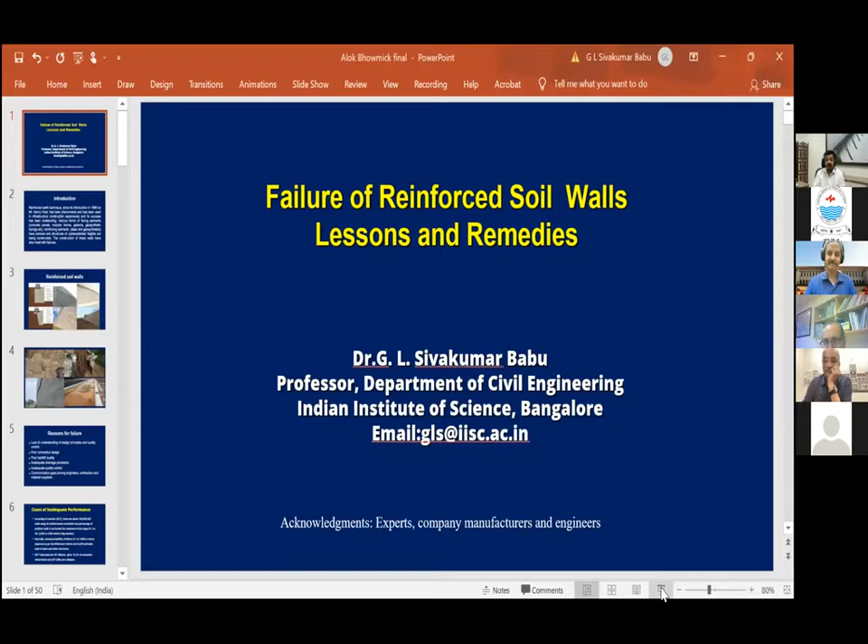Surely. So our today's session is on a very interesting subject: failure of reinforced soil walls, lessons and remedies.

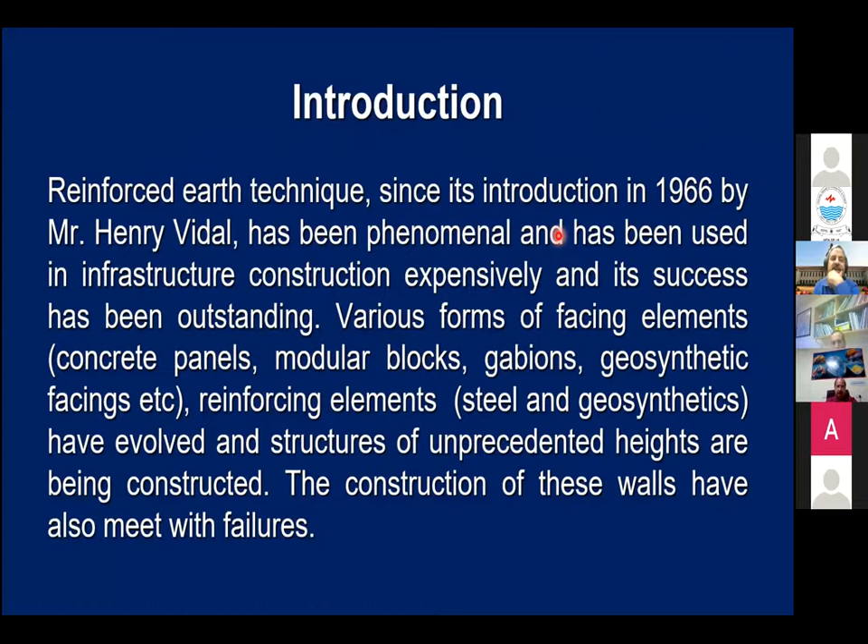We all know that the reinforced soil technique was introduced by Henry Vidal in 1966, and its impact has been phenomenal in infrastructure. It has been outstanding, and we have seen a lot of construction techniques develop because of that. We are going for regular reinforced concrete retaining walls, but now we have reinforced soil walls.

The reinforcement is coming from geosynthetics and the facing element, and we have different types of facing elements: concrete facing elements, modular blocks, gabion walls, and varieties of systems. In certain cases, to increase the stiffness of the whole structure, we even have a secondary reinforcement, quite common nowadays, with tight reinforcing elements in the form of nails. There's some sort of system here.

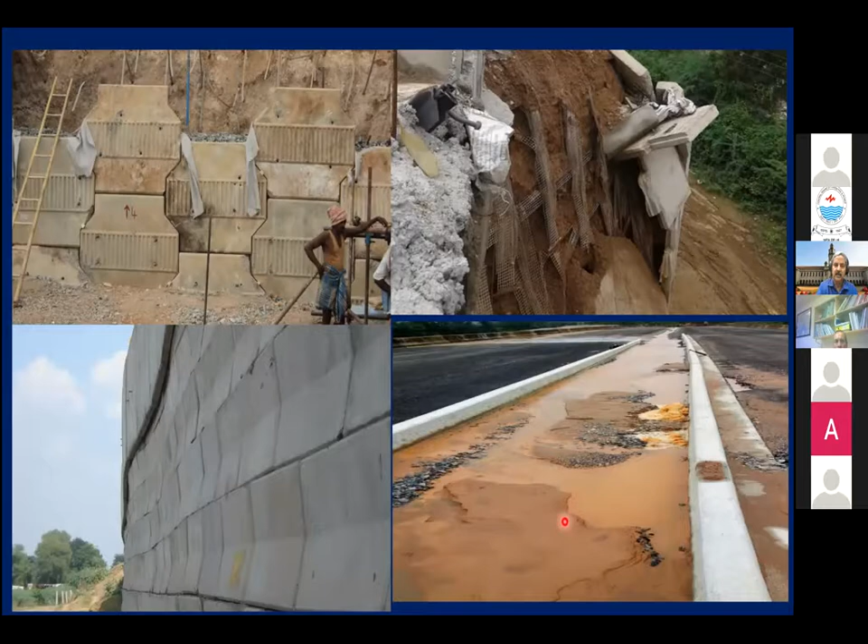General understanding was that there are a lot of failures happening. Now there are different parties working here - you have an owner, a designer, and many others like consultants and manufacturers. So all of these people are there, and there's a lot of changes taking place. And what is happening is some of the reasons that I just listed here.

One is a lack of understanding of the design principles and quality control - why there are some problems here. Then poor connection design - there is a reinforcement and it should be connected facing, and there is a connection issue. You have seen that some facing panels have come out. Then the backfill quality that is so important has not been satisfactorily done. Then the drainage that we need to provide for the system is not satisfactory. Of course, the total quality control in the whole system is another issue, and a lot of communication gaps among engineers, contractors, and material suppliers.

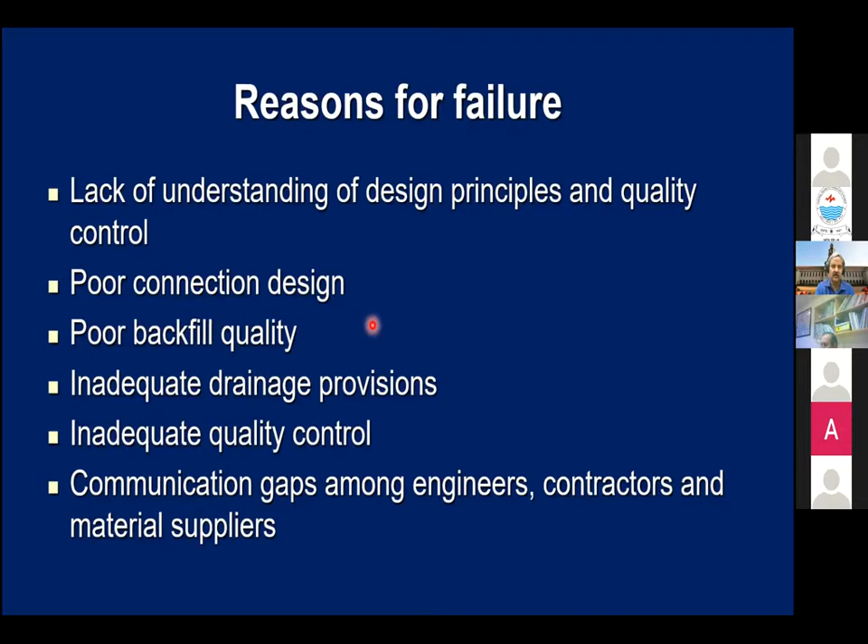This is what we see. So the issue is that when the technique has been so popular in the country, and at the same time there are a couple of failures - why is that? That's what we'll examine here.

Let me just come up with the studies by Koerner, who is actually the father of geosynthetics in the whole world. He has been a champion in this area, and he did a lot of survey on geosynthetic reinforcement structures, particularly retaining walls. He says that when you looked at more than 100,000 MSE walls, he estimates that there is about 2 to 3% or 4% failures, which is a big number. 1% or 2% is something big number, even in other places. I'm sure that maybe we are in the same range or maybe bigger, because we see that.

But I want to tell you that in civil engineering practice, we have this understanding of how many structures are subjected to failure. Say, for example, Professor Vivek will be knowing, particularly in dams, per annual probability of failure, they call it 1 into 10 power of minus 4. In fact, if you want to design a dam, you have to design for 10 power of minus 3 to minus 4 per annum probability of failure. We don't want to see dam failure, right? So this is actually well recorded, and most people are using it.

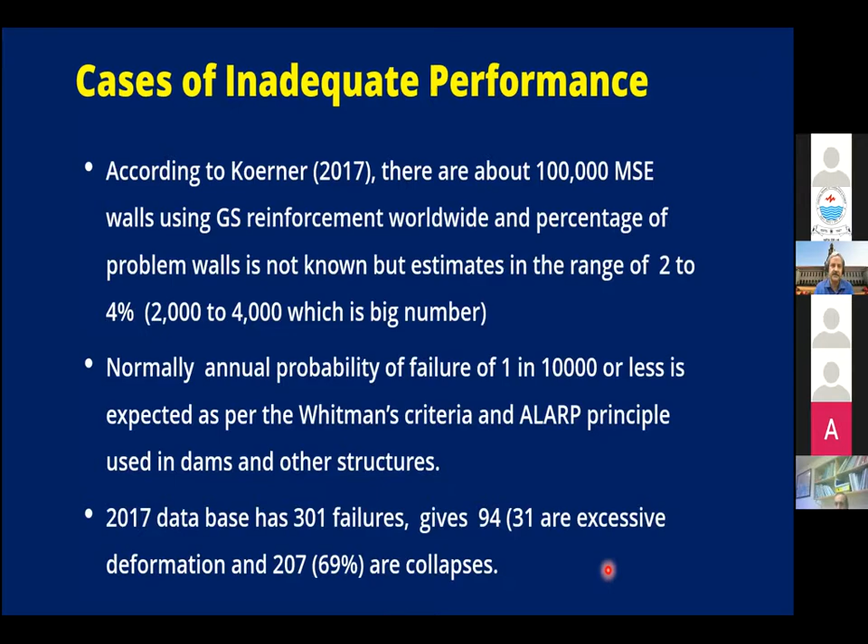When you are trying to look at failure mechanisms of all of the 301 or whatever number, he is even trying to categorize why is that. When you have, there are two things when you are trying to look at stability - one is external stability and internal stability, right? So in the 300 numbers, the internal stability, like when there is a reinforcement issue, that constitutes about 22%.

Soil - why? Because the friction between the soil and reinforcement may not be adequate. Actually, low soil friction - the soil friction itself is low, and then the interface soil friction is also low. Wide spacing of the materials - there should be something reasonable. You may have a design, but at the same time, certain constructional considerations, we need to have proper spacing here.

Then the length of the reinforcement and also the wrong orientation - I will give an example of some of them here, particularly the wrong orientation, with case studies over the years. That is internal stability, and the external stability, like what we use for regular retaining walls - sliding, bearing capacity, overturning, and all of them.

So there are failures because of high surcharge, low soil strength, bearing capacity being low, steep exit angle, okay, then seismic forces, internal water. What is that? The thing is that the backfill, the wall fill gets - whatever the reinforced soil wall is - it's because of the rainwater, there could be a problem.

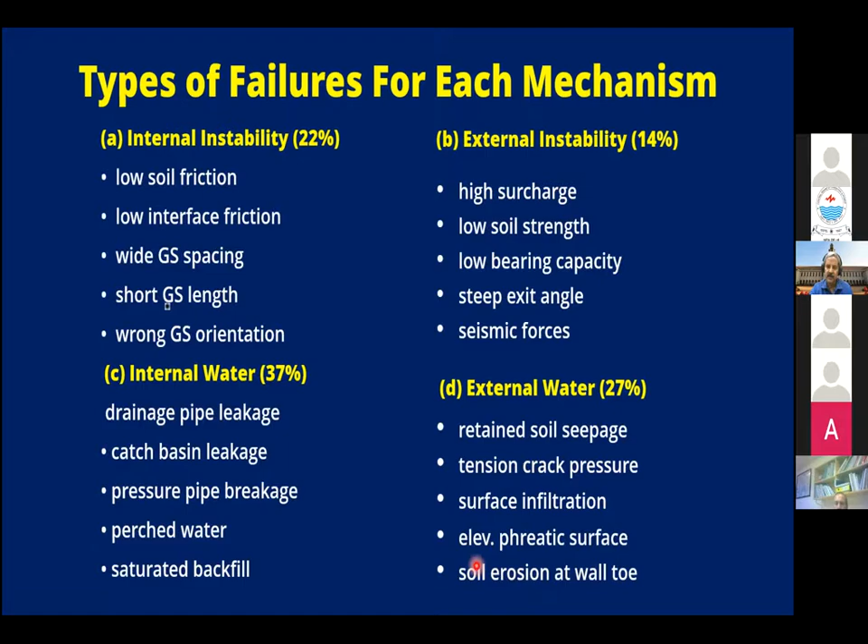So the drainage is not sufficient. There is a catch basin leakage. There is a pressure pipe breakage, perched water, some saturated backfill, or even external water - retained soil seepage. I showed one of some figures. Tension cracks, like you suppose you have some cracks at the bottom, top - there could be additional pressures, surface infiltration, phreatic line, soil erosion. This is all something that we have seen.

There is a need to understand and come out with some plan to reduce this number of failures in India. And of course, anywhere in the world, it's quite appropriate. I was just trying to see what are the typical reasons for the failure of reinforced soil structures. What I did was put a questionnaire to some group of people who were constructing. In fact, they're all members of the IGS.

Say, for example, Maccaferri, then Strata, and all of these people. I was in touch with them. I asked them, what are the typical reasons for the failure of the reinforced walls that your organization handles? Because they have been advocating, it is their bread and butter, but still they had some failures.

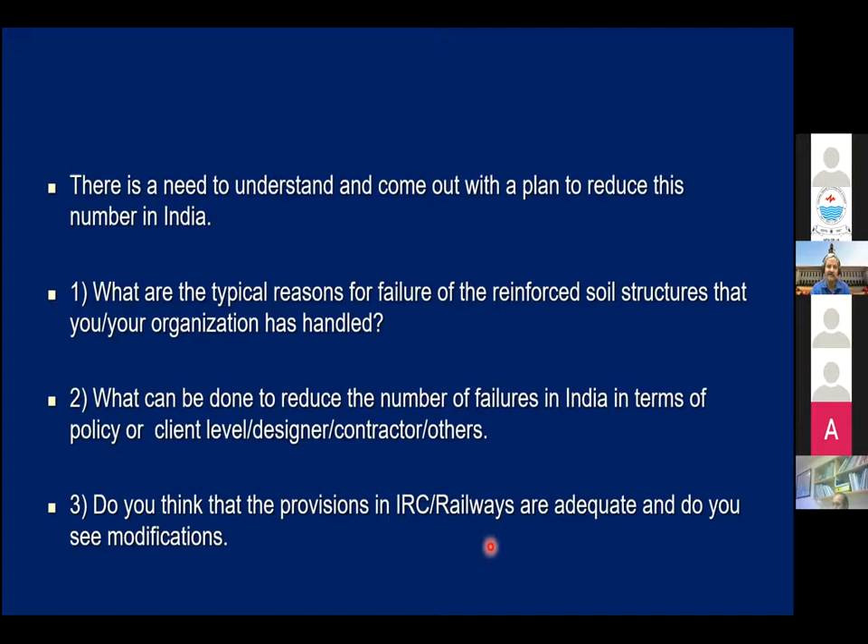I was asking them what are the typical reasons, what can be done to reduce the number of failures, because this is what is important for us. And what do you think about the IRC provisions, railways, the user? Do you see any modification? These are some questions that we had, and I had some discussions. So I made it like a critical review, and I showed some failures.

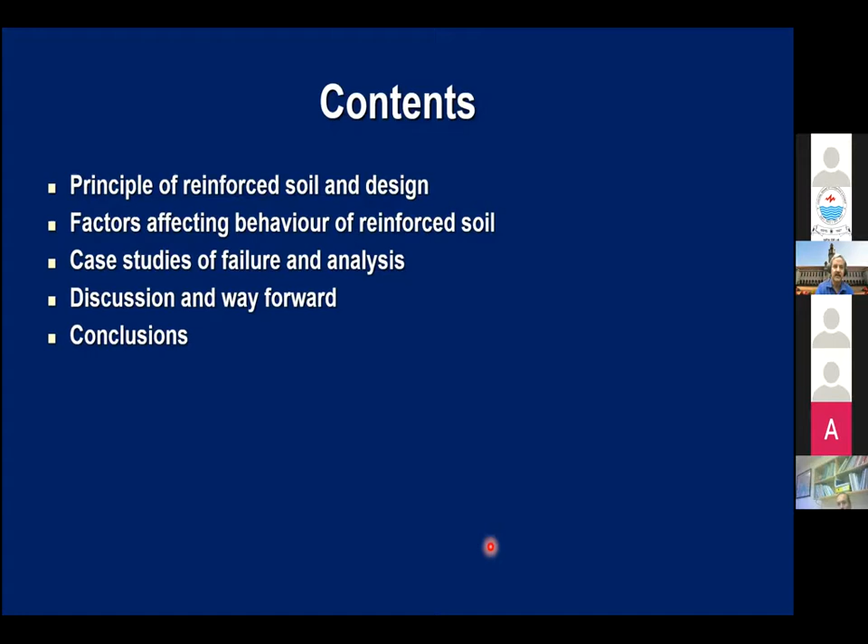Then the contents: what I want to tell you is, let us understand the principle of reinforced soil and its design, what are the factors affecting the behavior of reinforced soil, case studies of failure and analysis, and discussion of the way forward with some conclusions.

When it comes to retaining walls, we're used to, in the classes, cantilever, gravity, and braced. They're called externally stabilized, in which you have a retaining wall, and it is a gravity wall. The weight of the retaining wall takes care of the force acting on the system. Whereas here, the bending moment and shear force, and this is again external stability and all of that.

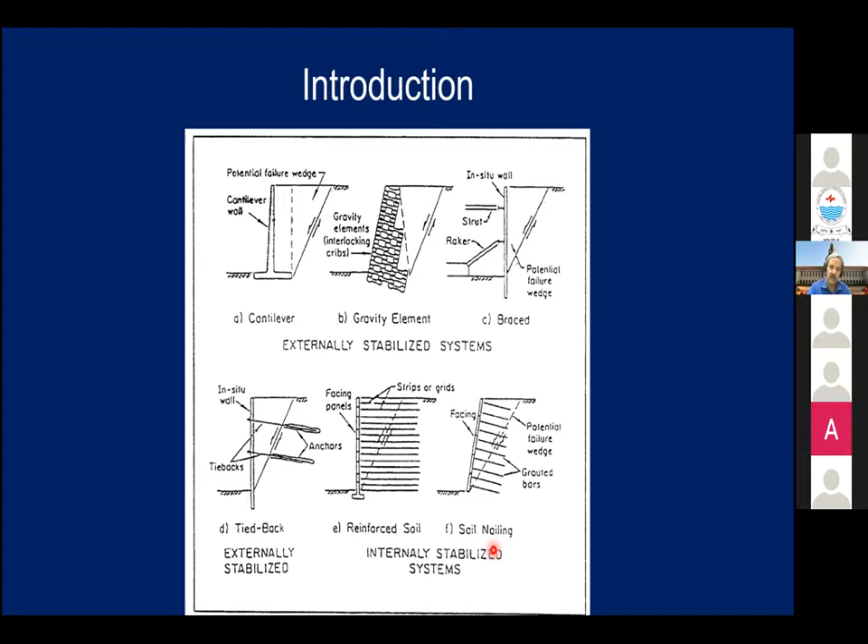As opposed to this, we have internally stabilized systems where you have a reinforced soil wall, in which, because of the friction between the soil and reinforcement, there is a resistance to shear. So as a result, you have the reinforced soil wall, the soil nail wall, tie-back systems, and all of that. And we all know the principle of reinforced soil. This is the origin from which it came.

The example that everybody shows is that you have a soil, and then you put some sheets of reinforcement and stand on it. You can stand here, so that way it increases the bearing capacity. This is a standard photo, I'm not sure if it's Henri Vidal's photo, but you can see that the reinforcement in the sand helped in increasing the stability of this reinforced sand. That's the basic thing.

When it comes to the British BS code, reinforced soil is a general term which refers to the use of placed or in situ soil or other material in which tensile reinforcement acts through interface friction, bearing or other means to improve stability.

So the understanding of this tensile reinforcement and interface friction came at that point when Henri Vidal did this experiment with pine needles on the sand. When he was sitting on the beach, he had these pine needles, and he inserted them here, and the daughter wants to jump on it, and she plays, and finds it amusing.

And of course, Henri Vidal is much more surprised. He goes to the laboratory and finds that it's interface friction that's responsible for this sort of behavior. And he goes back to the lab and develops the reinforced soil design procedures.

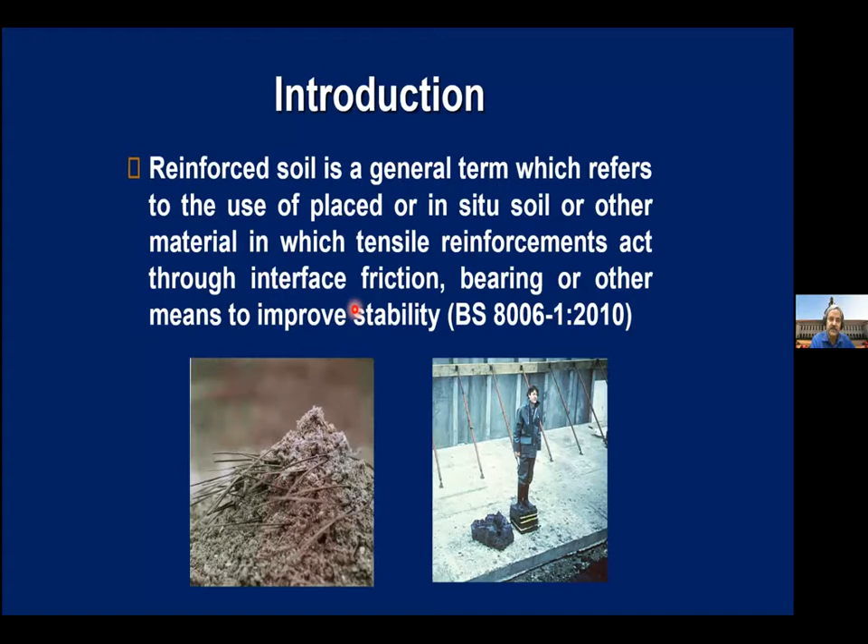So when it comes to reinforced soil, you have reinforcing elements, like a strip, a grid or anything. And then the facing elements, because once you have this friction between the soil and reinforcement, you need some sort of facing element so that the soil is contained in its place, so that it doesn't get eroded.

Then you have the backfill soils, which is supposed to be the wall fill in technical terms, like sand, a good sand material, because when we say that there's friction between the soil and reinforcement, we depend on the interface friction.

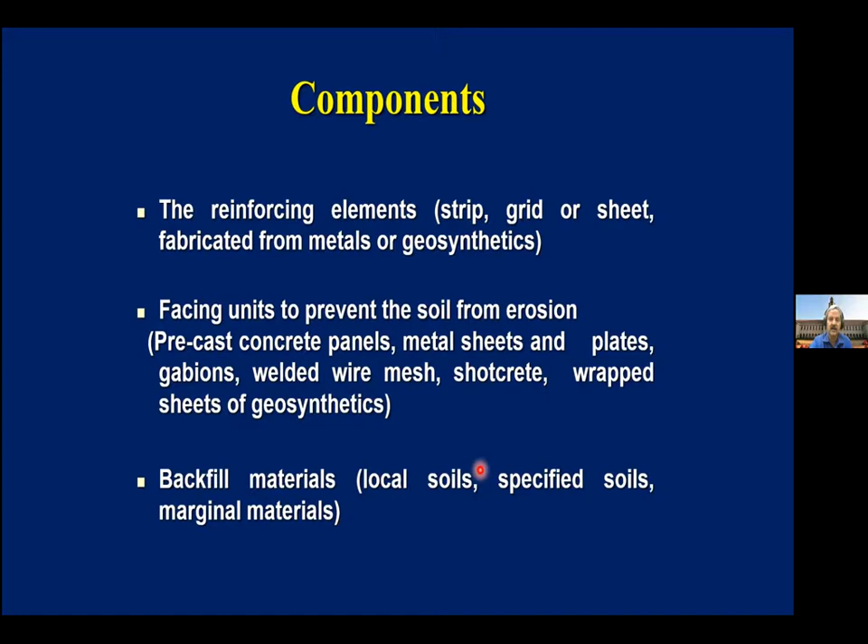So if the soil is good, like a sandy material, for example, if the friction angle is 30 or 40 degrees or 35 degrees, we take 2/3 as the interface friction. So something like that we do. And so I just showed you that figure: what is the principle of reinforced soil? That's what we should understand.

Because I always find that when you talk to a structural engineer or another person, they get perplexed with this. See, that is where the communication gap exists. The structural engineers are quite proficient in structural engineering principles, but when it comes to understanding reinforced soil, it is a problem. I have seen a lot of failures because of that, because they try to always balance between the length and the diameter of the reinforcement. I don't know if you have interacted, you must have interacted, but here the principles are somewhat different, as I'll explain in a minute.

You take an unreinforced soil, you apply a load, then it has a tendency for vertical deformation as well as horizontal deformation. But the moment I put a reinforcement, there is a friction that gets developed on the surface of the reinforcement. It can be a simple sheet, even a paper. So you'll see that it stands better. There is less deformation; the vertical is higher here, much less here. And then there is a small horizontal deformation also.

But these deformations are required to generate the tensile force in the reinforcement. Okay, so it will be intact till it reaches a sort of new equilibrium. It's like a new person with a lot of reinforcement, like a lot of injections and all of that. So we try to explain the concept that reinforced soil is better, but it can fail if the load is more or if the tensile force is higher, the moment the reinforcement cannot take any more load.

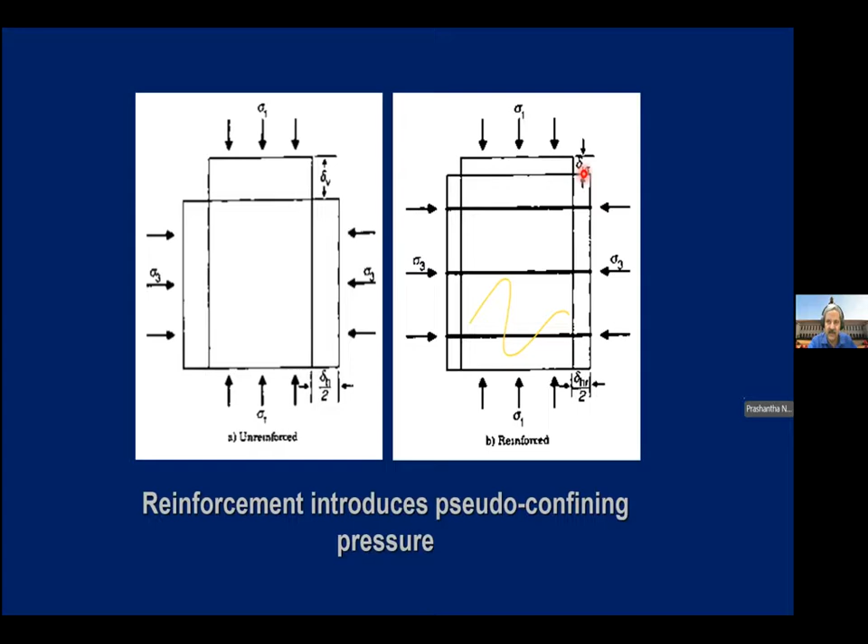And the other one is pull-out failure. Okay, so it induces what we call a pseudo-confining effect. I just mentioned that here you have a sort of confinement, but the advantage is that because it's not deforming, there is a lesser horizontal deformation, or a horizontal confining stress is acting. That's why there is less deformation, less horizontal deformation, less vertical deformation. Why? Because we assume that the pseudo-confining pressure is there.

Okay, there is some mark here. Can somebody erase it or something? I don't know. Okay.

So the mechanisms are that, suppose you have an unreinforced slope, and at the same time a reinforced one; as I just mentioned, because of the mechanisms they have, the reinforcement intersects the failure surface, here.

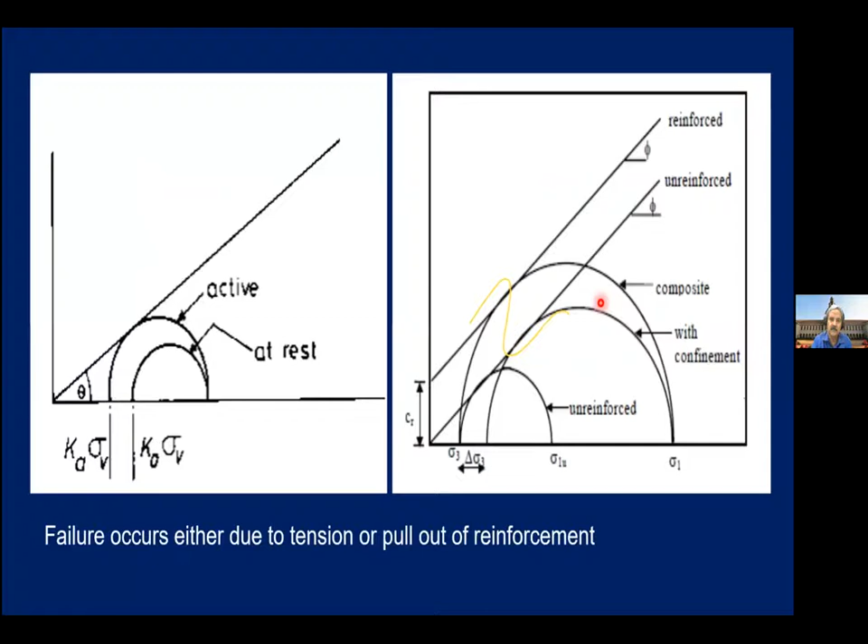So how do you erase this mark? Can somebody help me? There is some mark that somebody has put in here.

Okay, I can continue. So this is an example of a direct shear box we know. We know that if a normal stress is applied and shear stress is applied, the shear stress is nothing but PV tan phi. But if you have a reinforcement there, there is a friction. So you have a reinforcement force developed because of this arrangement here.

And so the shear force is reduced, and there is actually a vertical force. If you resolve, there is a tensile force PR. So PR cos theta is a vertical confining stress added. Increasing normal stress always gives better stability. And then you also have shear resistance reduced. Normally in pure soil the shear force is only PV tan phi. Now the increase in shear resistance is PR cos theta tan phi. Phi is the friction angle of the soil, theta is the inclination. This is a simple thing.

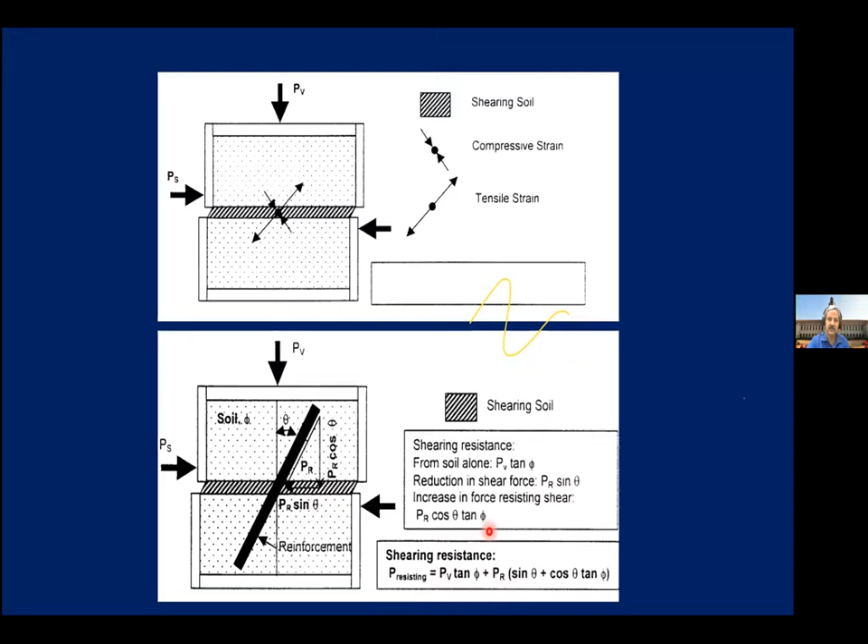So this is an example: in a reinforced soil, the friction angle is 30, 40, it can be whatever. And the orientation, for example, this angle here, you can see the reinforcement angle to the failure surface is in the range of 30 to 40 degrees. And it can even be 50, 60, there is no problem.

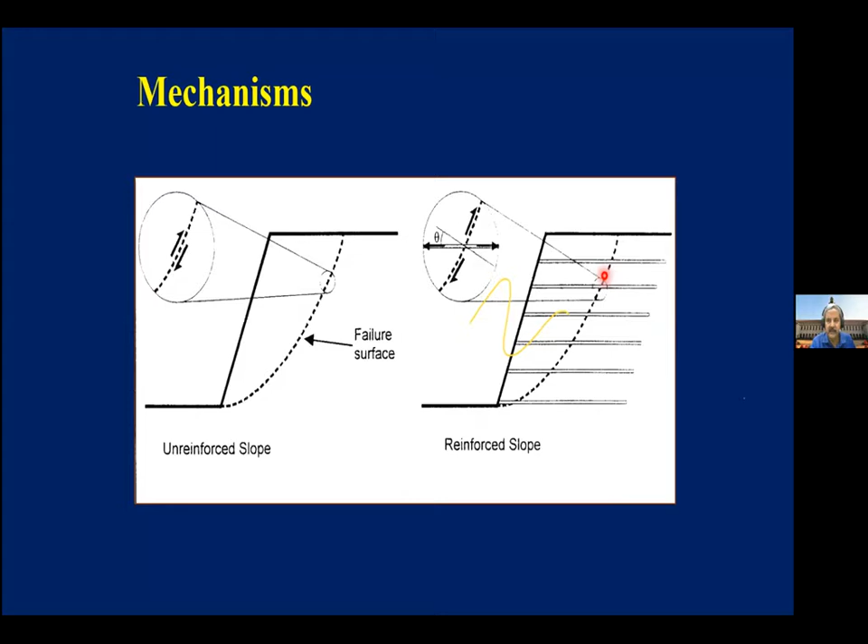And then even the same thing happens in the bearing capacity problem, slope stability problem, and wherever there is a failure surface, if you put the reinforcement, it alters the forces and it increases the shear resistance. That's what is going to happen. And one beauty is that between 30 to 60 degrees, you can see that there is always that increase there. So it's not really sensitive, and it's very good for our geotechnical applications.

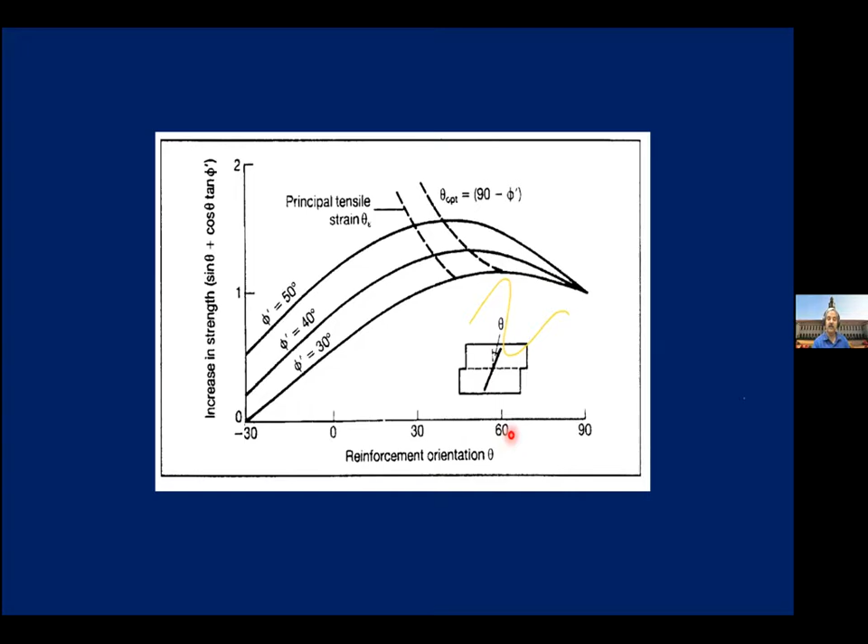Then now once you put a sand backfill material, it should be compacted properly. Okay, that's the main problem in most of these RE wall failures, that if you don't compact it... I'll just show you some examples that compaction is a very, very important thing in geotechnical engineering. Otherwise, it leads to a lot of problems. So I just mentioned about the effectiveness of the reinforcement.

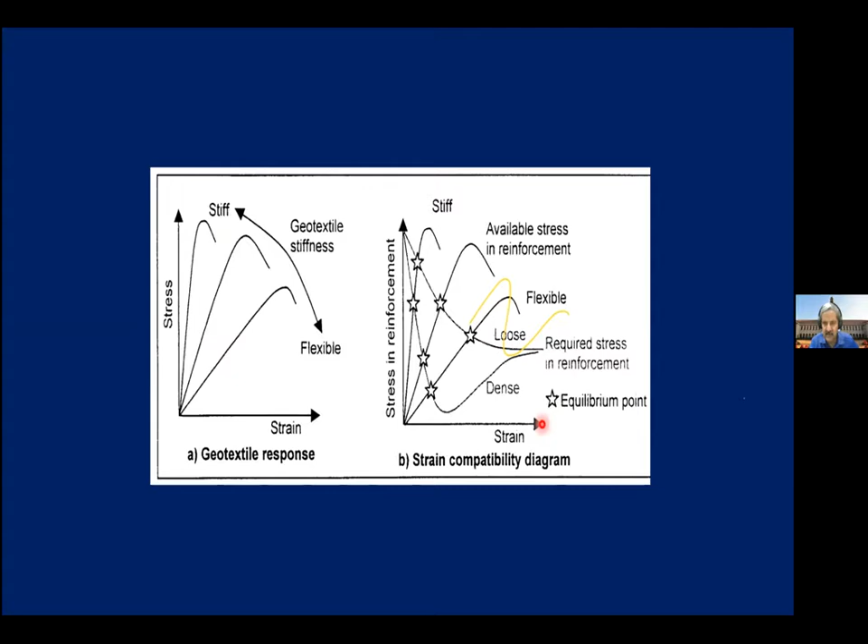But that only tells you about the importance of information here. Just to highlight that the stress-strain behavior of the reinforcement, and also the stress-strain behavior of sand, the type of sand, whether it is loose or dense, also matters in engineering practice. Okay. So what are the factors that influence the reinforced soil?

What I just showed you was the explanation of the reinforced soil principle, that if you have reinforcement in soil, it increases its shear resistance. Because soil is poor in shear, it increases the shear resistance by giving additional confining stress. It also reduces the shear forces that are causing shear. So it's a very nice calculation one can make, but of course all the programs give it. That is the principle, it's fine. But when you try to implement it in the field, you should understand what are the factors that affect the performance of reinforced soil.

One is the reinforcement. It can be a form of the reinforcement, like as I said, people are even using fibers, you can be using geogrids, anchors, bars, strips. Any type of reinforcement can be used. Then the surface properties of the reinforcement are very important because it is happening through friction. Then the dimensions. See, you're trying to calculate the forces in the reinforcement, so dimensions are important.

The strength. I just mentioned the strength, I showed you the stress-strain curves. Then the stiffness. The strength and stiffness are very important. For the geogrid, it may be more flexible, but the strength is good. But in a reinforced soil with, for example, steel grids, the strength is good as well as the stiffness is very high. So the proper choice of reinforcement is important.

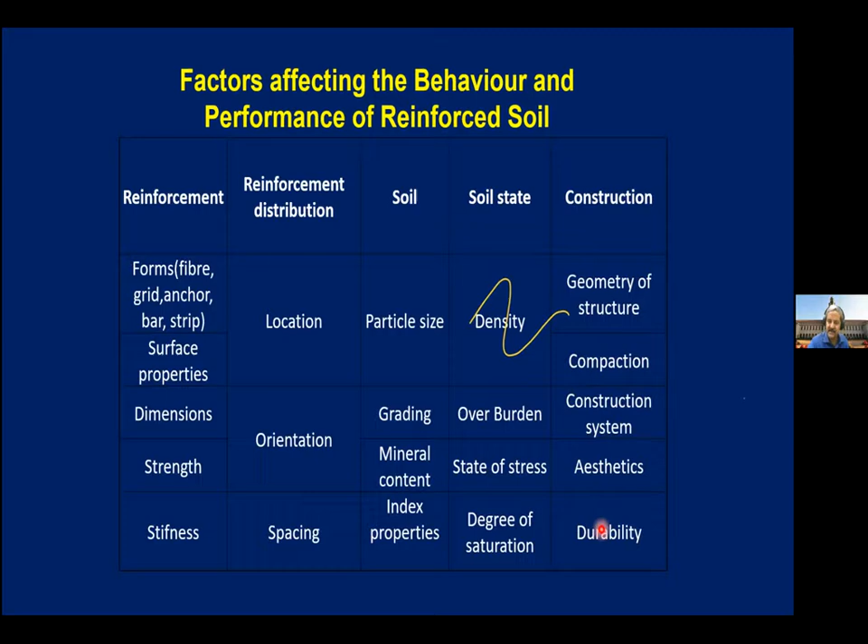As I said, compaction is important, particularly in the field. The construction system, the way we construct facing elements. Then aesthetics also matter, durability, all of this is important. So what are the elements of design? As I said, external stability is similar to what you do in regular retaining walls, like sliding, bearing, and overturning.

Internal stability: since you're putting in the reinforcement, we should see that it doesn't fail in tension, tensile overstress we call it. Then pullout: the reinforcement should not come out. The third one is the facing connection. When you connect the reinforcement to the facing, it should not break there. These conditions we should take care of in a simple way.

So having understood some design principles, the way we design is, for example, external stability: we have the regular checks of sliding and so on, three of them, in the reinforced soil calculations. To do that, they're all given in codes.

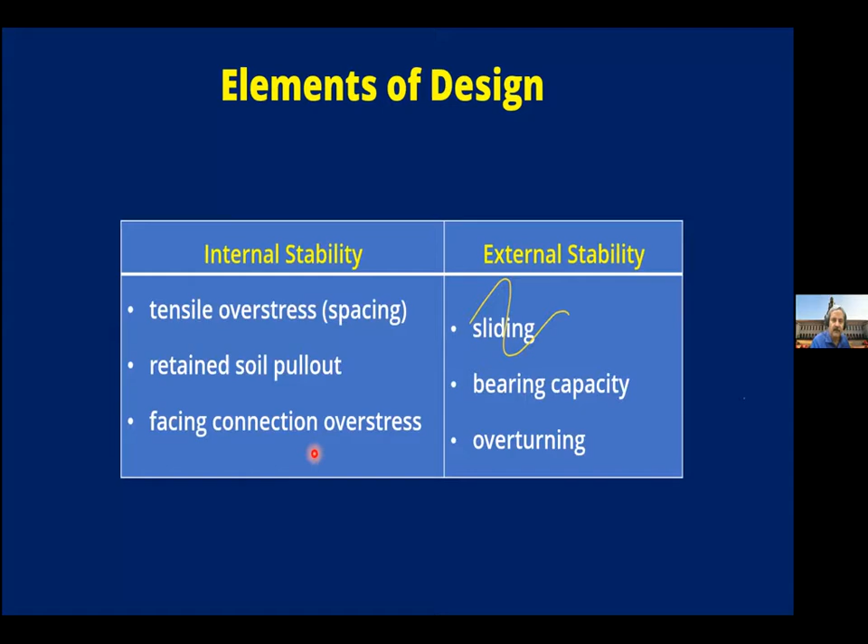Then for internal stability, we assume an earth pressure distribution, calculate the force coming on the reinforcement, and see that there is always a factor of safety everywhere. The factor of safety with respect to tension and pullout is sufficient. Even for connections, the factors of safety are more than the numbers specified in codes. That's how we do the design, but it doesn't always happen, right?

We have seen many very good successes all around us everywhere, but there are a lot of failures as well. This is an example I saw some time back. We have many, and I don't want to show so many failures, but I want to give a sort of context for the lecture I'm giving.

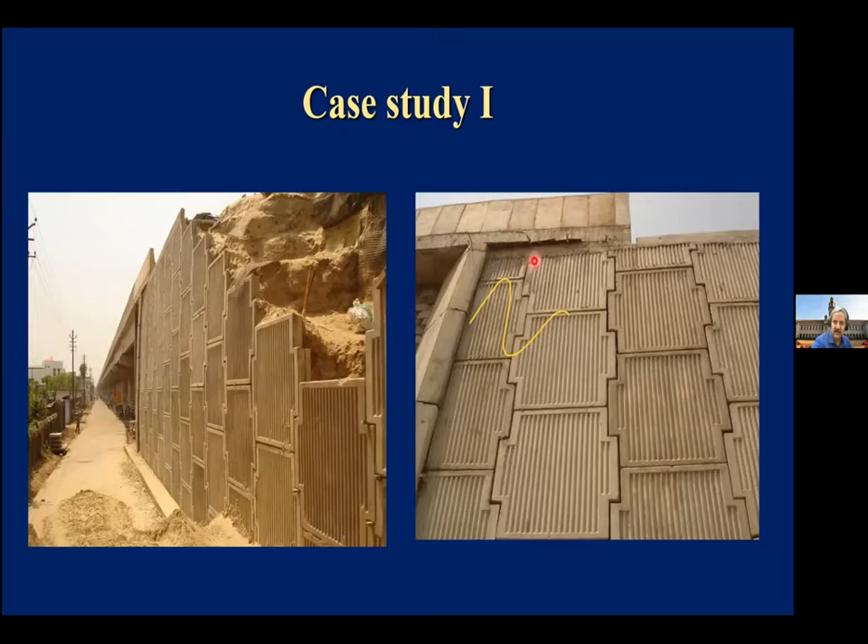Here, before it was opened for traffic, all the facing panels came out, and you can see the way the loading is coming on the facing, which should not be there. This is just an example. Of course, there's a bulge and all of that.

There's another section here, where the geogrids have to be connected, but there is a failure here, so they have all come out. What happened in this case was this type of connection they had. It's actually a connection failure.

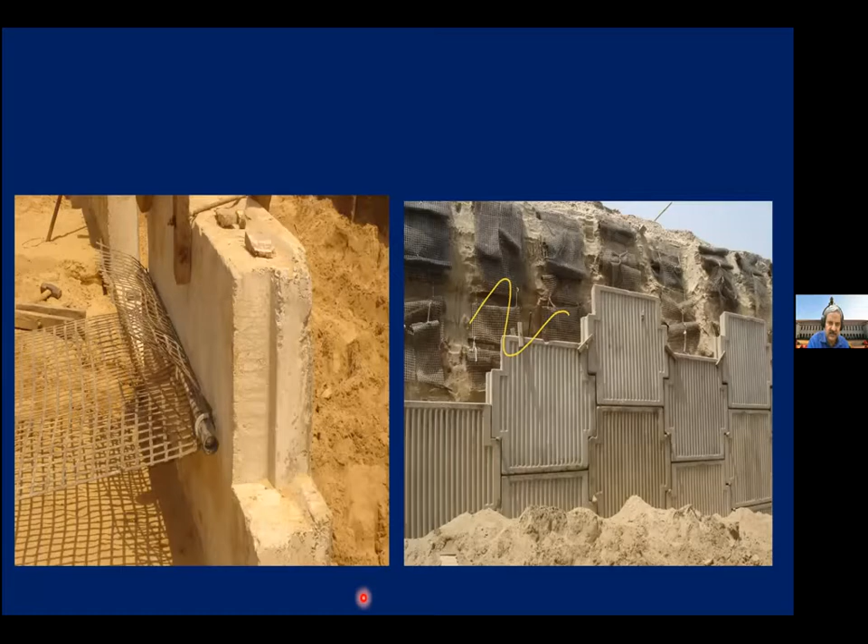When you want to do a failure analysis, and I worked on forensic geotechnical engineering, there is a systematic method of doing it. You have to understand and characterize the distress. Then you should do some diagnostic tests, like backfill tests and geogrid samples.

Then you have to understand why things failed. You should develop what is called a failure hypothesis, and also check the design. The moment you go to the site, you would generally have some reasons to say why this happened, because you have the background to understand what has gone wrong.

Then you try to check with actual calculations and reiterate everything, then come up with a failure hypothesis, then do actual analysis, sometimes using conventional methods. As I just mentioned for retaining walls, reinforced soil walls, you have a lot of design methods like the tie-back wedge method or the coherent gravity method, depending on the type of reinforcement and all of that.

You also have numerical methods, because numerical methods will give you a clear idea of the deformation. Reinforced soil is deformation controlled, and if you want to understand deformations, you have to do the numerical analysis. Then you give suggestions and specifications for rehabilitation measures based on the analysis.

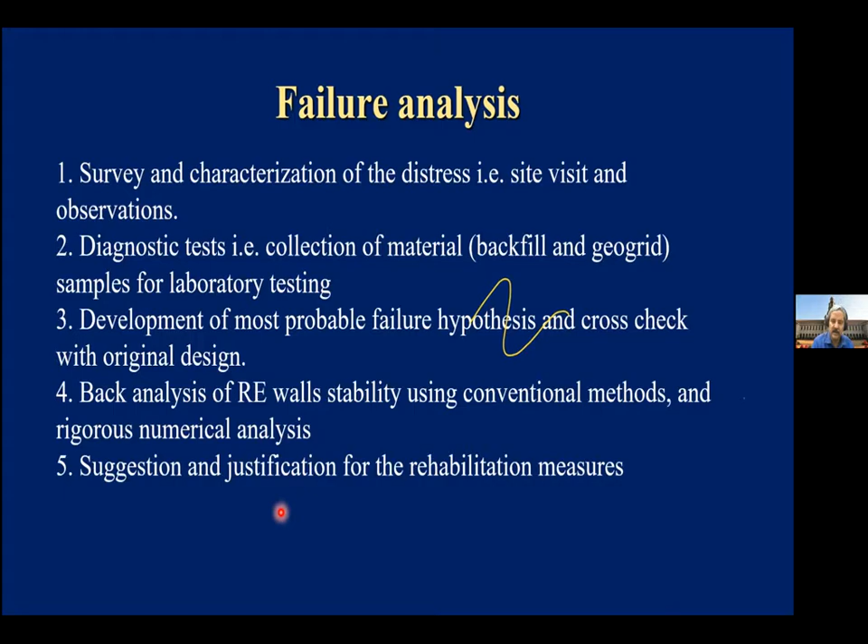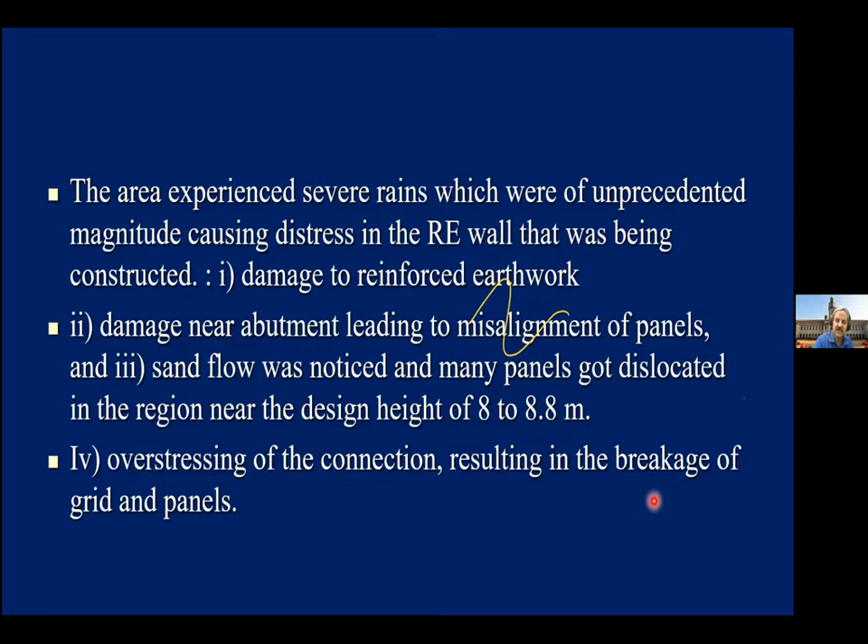Okay. So the reason here was that the area experienced continuous rain for 4 days, and it led to damage to the earthwork, damage near the abutment, leading to misalignment of panels, which you have seen, and sand flow was noticed in between some of the panels. At the higher heights, it led to overstressing of the connection, resulting in breakage of the grid and panel. That's what happened.

So then we looked at all the calculations. The shear strength of the soil was good, because you have seen good sand material being used, compacted, everything is okay, and we also measured the permeability of the backfill, because, as I mentioned, there was a lot of rain. Though the permeability of the backfill was good, the rate of infiltration during those 4 days was so high that it led to a flooding situation in most of the cases.

Some places were unfinished, and it was about to be opened for traffic, and they had not put even a proper cover. They should have put a plastic cover; they would have avoided the infiltration. Then somebody was blaming them that they used a geotextile here instead of the backfill, and that led to the problem. Actually, that was not the problem, because the permeability was okay. The permittivity and other things seemed to be okay.

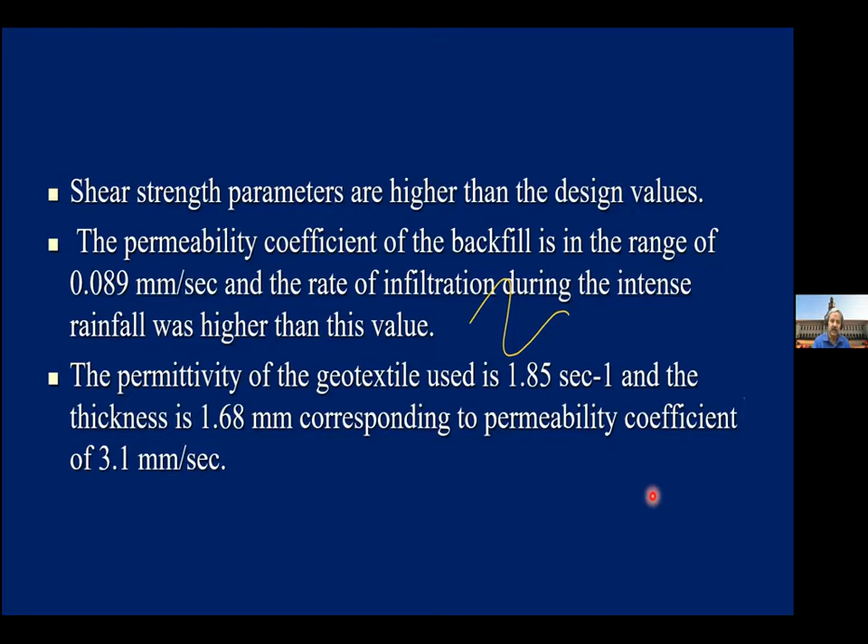We have a habit of putting a geocomposite or a geosynthetic material next to the facing. That was okay. But they had not put the drainage element, that 600 mm or whatever. So that was an issue there. They were mentioning that was the reason, but when you look at the permeability, it looks to be all right.

Another important thing we observed was that when there is so much rain, as I said, there is flooding, and the earth pressure will increase a lot, because we assume sand with a drained friction angle of some 30 or 32 degrees. We assume the coefficient of earth pressure, then calculate the earth pressure and what should be resisted by the reinforcement, all that we calculate.

But we have not accounted for the pore pressures, what happens if there is a lot of flooding continuously for 1 week. So that led to a considerable increase in the reinforcement load, and also panels could tilt. In some places it has come up. Then there were also minor issues.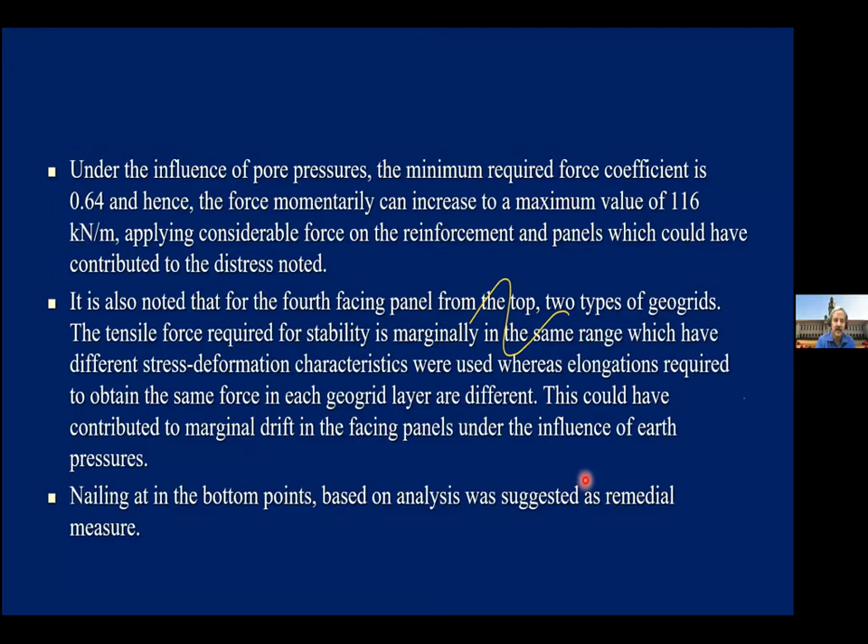In some places, we tend to use two varying types of geogrids, but the stress-strain characteristics will be marginally different. And if the soil compaction is also not good, that may lead to differential shear stresses and differential movements, marginal drift that can lead to something. Some remedial measures were suggested, but I think finally there was a problem with the failure.

The second is another one that we just recently did. It's again a highway, national highways or railways. Actually, it's National Highway 1, and the facing panels came out, and you can see that the clay content is a little high. It is not a big failure. You hardly see; there are only 3 or 4 panels, 1, 2, 3 maybe.

But these photos were circulated throughout India on WhatsApp. Right? I remember, everywhere, all the groups in engineering, right? We are experts in WhatsApp circulation.

So you can see the type of soil here. So here again you can see the connection to the design. I'll just show you. There we were able to rehabilitate it in some form. You can see 1, 2, 3, 4, 5 panels.

We removed that one panel on this side and repaired it. It was all right. Luckily, within 3 months it could be restored.

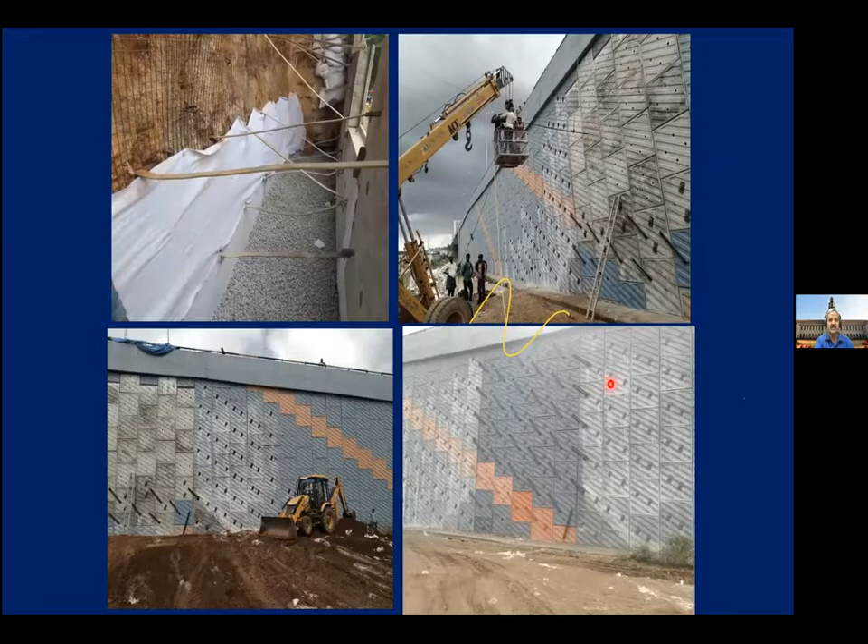What happened here was the type of soil itself. Normally soil investigations indicate that the silt plus clay content is in the range of 28%, which is more than what is permissible, contributing to settlement of the soil mass, which affected the integrity of the connections. In fact, the connection quality was also not very satisfactory. I've seen that, but we don't have any connection tests that they performed, I'm not sure.

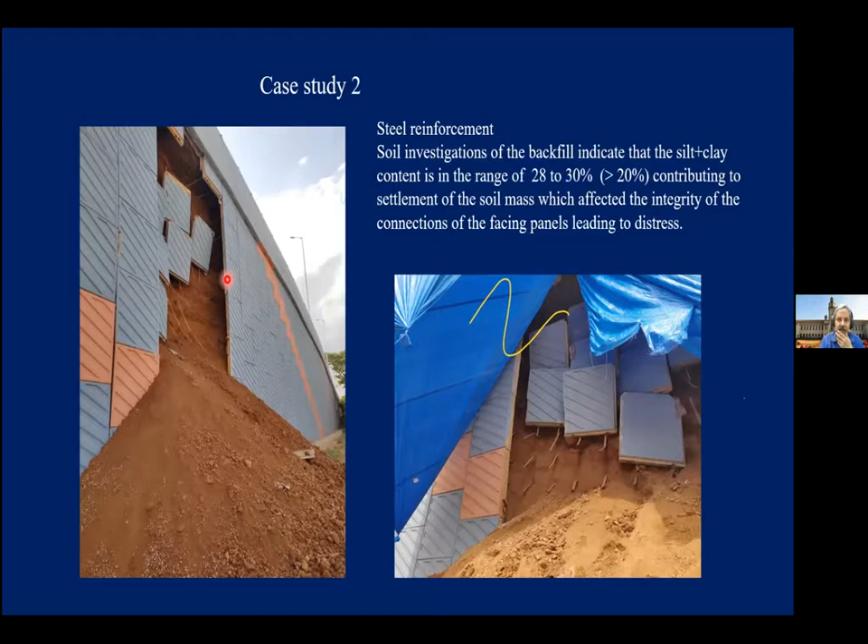But then we could essentially rehabilitate it in no time. That was the issue, there's no problem.

This is another confusing issue. Even now, the contractor abandoned the whole structure, more than 10 years now. And you can see the bulge here. Normally bulge has certain limits, but here it's about 400 mm, which is something very unusual. But the road at the top is all fine, very good. Everything is fine, you don't see anything at the top, and people are using it, they're happy with that.

But when it comes to the sort of thing I showed, the 2 failures I showed were more about collapse failures. In reinforced soil, you have 2 types: deformation failures as well as collapse failure, like I gave some examples earlier. Similar to that, I wanted to show some examples here.

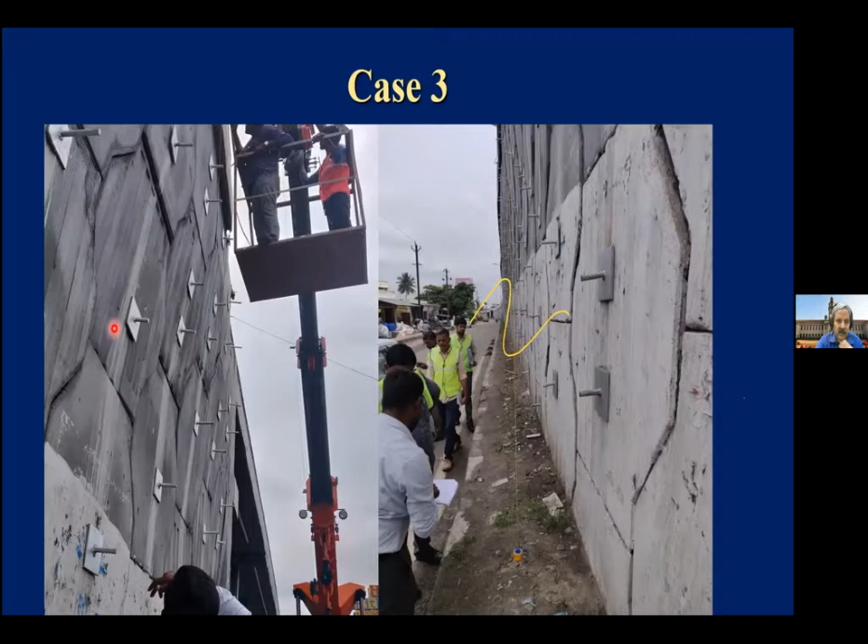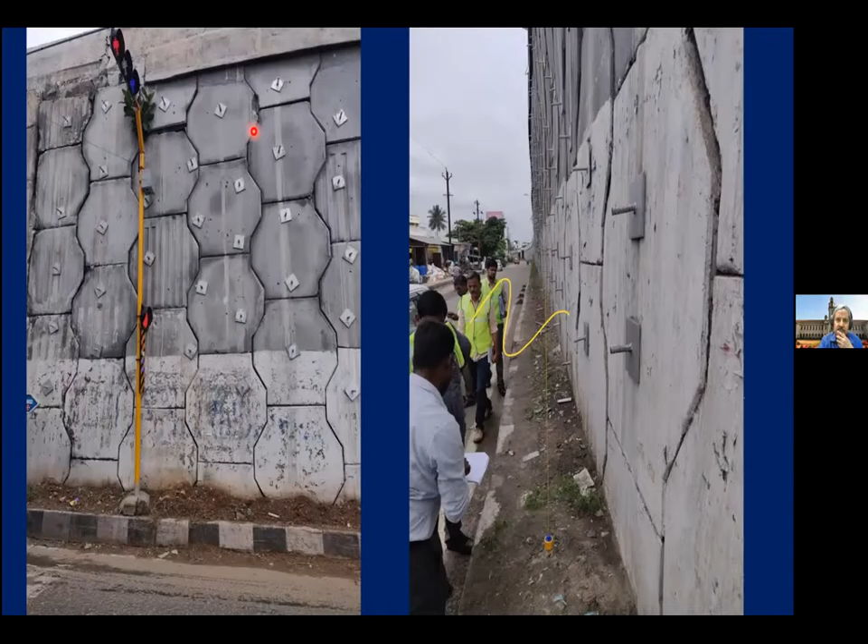So what exactly has happened here is what I explained about the strain compatibility diagram. Though there is reinforcement, it needs some strain to develop reinforcement force. As the strain is increased, there is more force, right? It depends - if the soil is poor, then it will need more strain. If the friction angle is less, it will need more strain. Some small changes will be there.

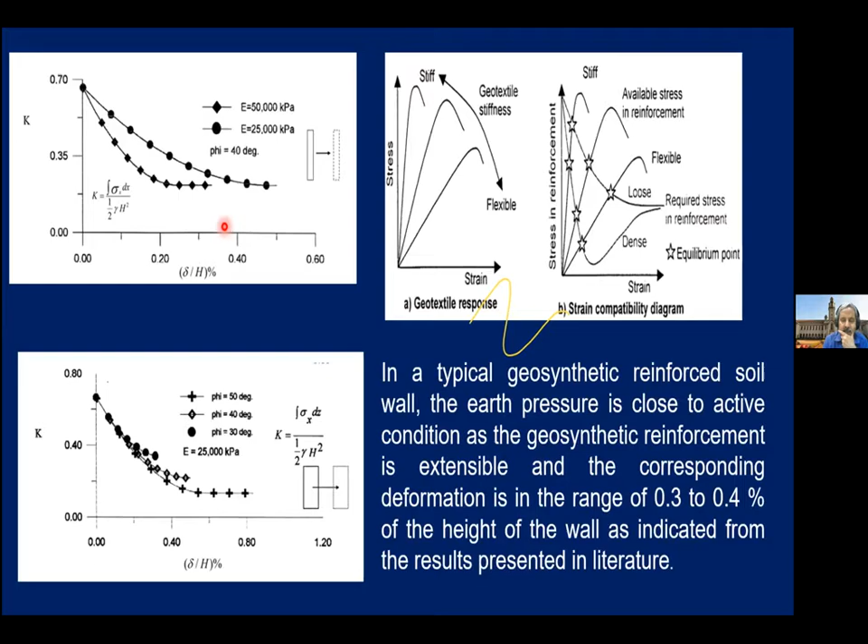What happens is that in this case, it's about 0.3% strain. For example, here, this is a good retaining wall - this shows the stiffness of the soil, good and poor. About 0.3% will be a typical strain, delta by H is the strain that gets developed, and deformation less than that or close to that is accepted because we need the force. But here it is much more. In fact, our code, BS 8006, says 1% as the limit and the design load is sustained. So if you use a flexible reinforcement like geosynthetics, even 1% is okay.

So the corresponding deformation for 10 meters is about 100 - in this case about 40 centimeters, which is slightly higher, but it was all right. The strain levels are high, the deformations are in this high range, but they have been constant for a very long time. People have noted this, and I checked it all.

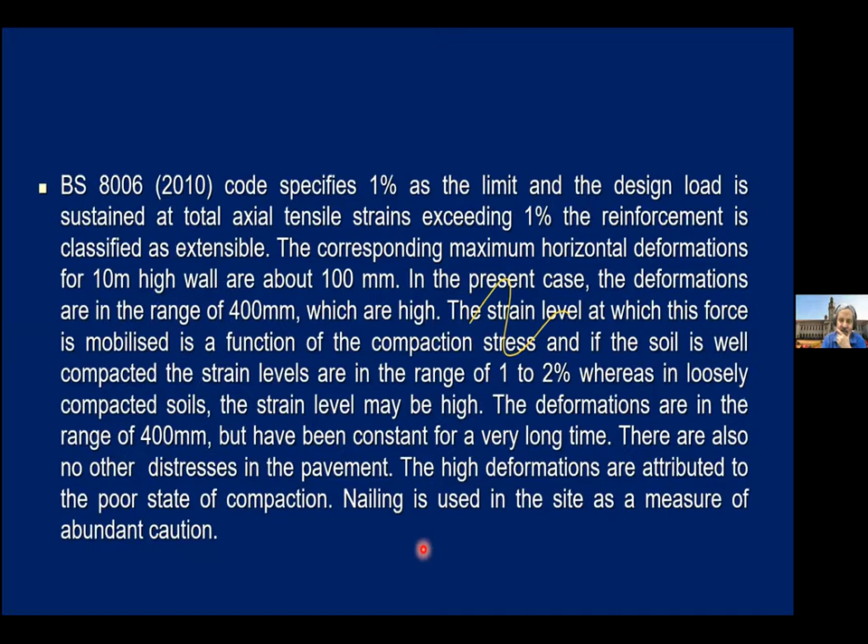But then maybe it is in equilibrium. It had deformed where maybe the type of soil is a little poor there, but then the compaction and even the type of reinforcement, low grade or something - there are no other distresses in the pavement. So the high deformations we felt were attributed to poor state of compaction, not too poor, but poor. So soil nailing, somebody had already used. We just have to tell them that you have to monitor the structure, because though the deformations are not acceptable, it's still working. So that's an interesting thing.

This is another case that I wanted to show. This is not a failure, it's a very good thing. It's a 42-meter high reinforced wall in Vijayawada, 10.5 meters each side, and you can see a lot of traffic here. At the top, this is essentially constructed to develop a parking place for the goddess temple at the top.

What happened was, you can see this is a modular block construction, and everything is fine. They started putting the backfill and doing all the compaction, and they wanted to leave it open so that the paved traffic can come and people can straight away go to darshan.

We should know that the soil is reinforced soil, and we have a lot of soil elements prone to settlements. So there were a lot of deformations in the soil, particularly, and whatever pavement was laid started cracking, and people were worried it may fail.

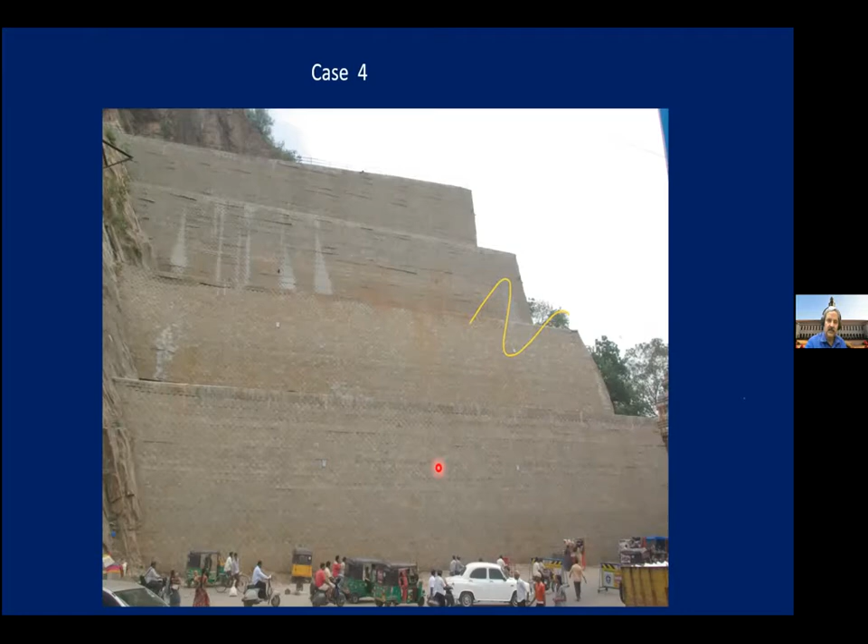But finally, when we made all the calculations, this is the way it is. The top area of the wall experienced considerable deformations leading to cracks in the paved area. The large settlements were a cause of worry, and they were wondering it may totally collapse.

But I said, let us look at it, because we have such a backfill, so much backfill in this material, and it's prone to settlement. You can't treat it like concrete, where you cure it, and after 28 days start another layer. With soil, you have all these deformations. I said you have to wait one more year because the settlements are going to happen; you do not build right away.

So I suggested they just monitor the deformations, and we measured them. They were in the range of about 1%, the same range of deformations we discussed earlier, which are okay. You keep filling it up, make sure the deformations are constant, and then start using it. So they had to postpone everything by a year, and it was fine.

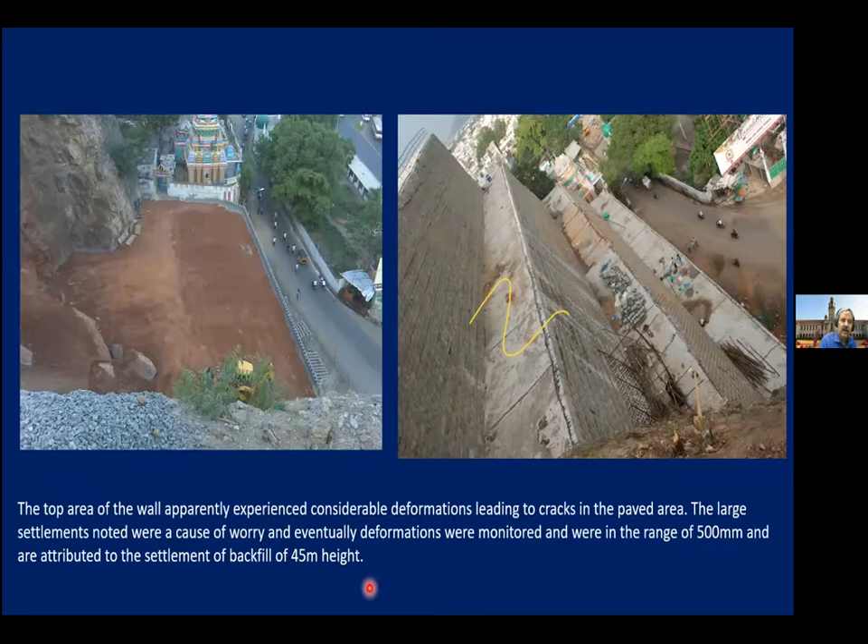Appropriate geotechnical interventions are required right from the beginning to the end. If geotechnical engineering is not there in the project, it could lead to uncertainty and issues of quality control and all of that. This is a good, very good case study.

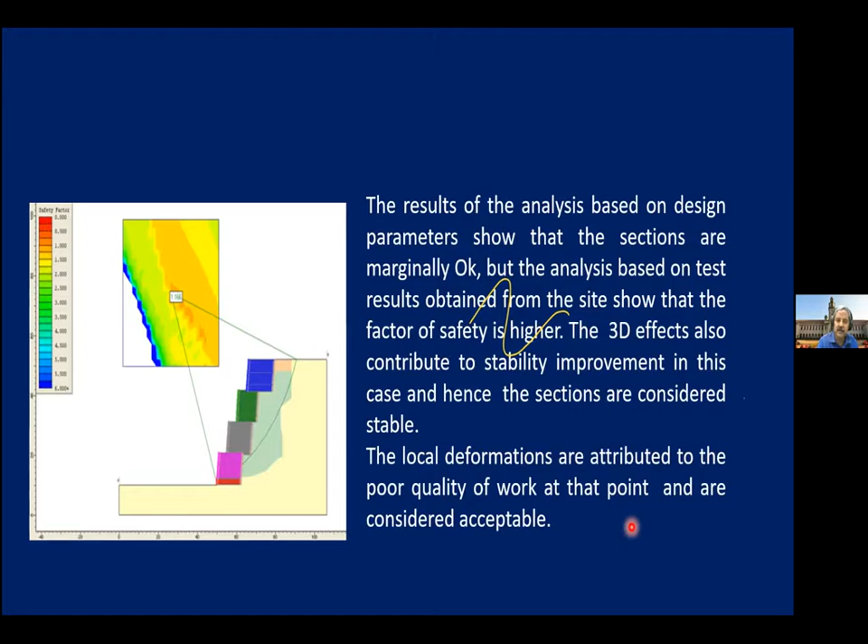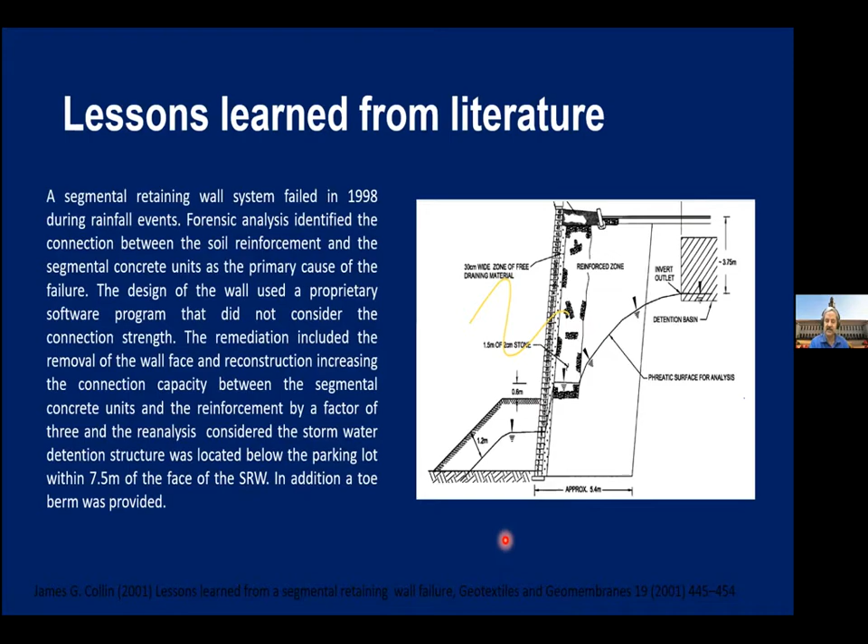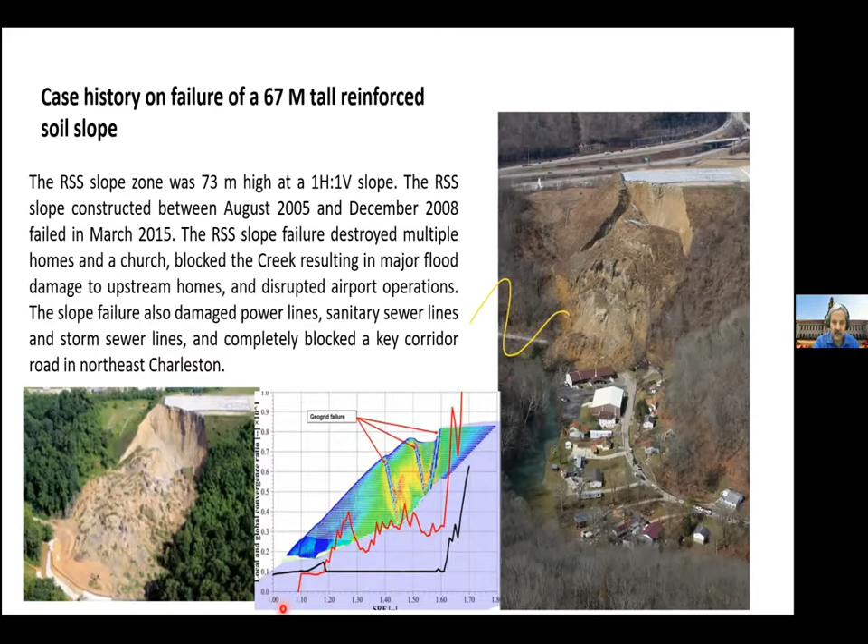Both of the cases I showed are talking about failure. The reinforced soil structure failure destroyed multiple homes. You can see that the road completely got washed away. It led to a lot of problems and disrupted airport operations. You can see the complete wall failure happened.

When you looked at why it happened, one thing was insufficient geotechnical investigation, and then the interpretation of the data for design and detailing. There are experts in reinforced soil in that country, and it still happened. I just showed one case from India and two cases from elsewhere, so nobody is above board. We need to work hard to see that failures are reduced.

So the 3D aspects, that's very interesting. I told you about this point earlier in the factors of reinforced soil. What happens is that the load coming is in a 3-dimensional movement. There is so much load - it's a 67 meter high slope. On every geogrid that is expected to reinforce, there is a 3-dimensional load coming.

There was insufficient foundation preparation, rock excavation, benching due to inadequate specifications, again at the bottom, founding of the RSS and compacted soil instead of freshly excavated bedrock. This is another issue - they didn't, and this is very serious, because the bottom has to be the best. If there's an issue there, it may lead to problems. So this is another important thing.

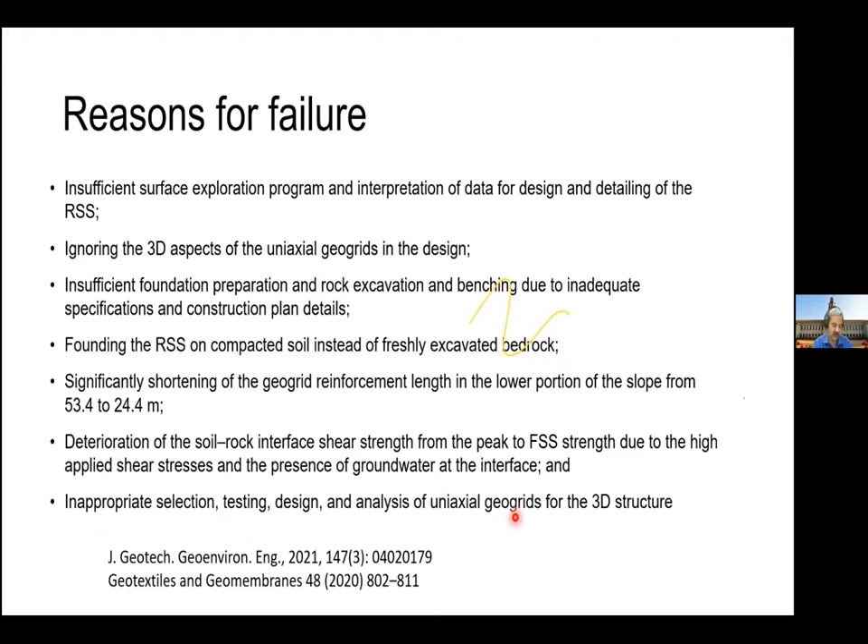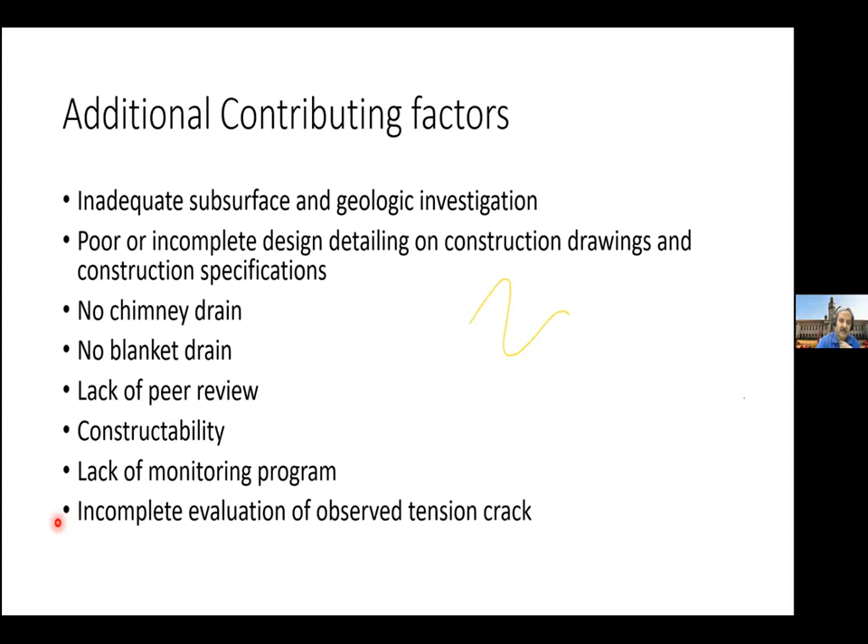This again is about inappropriate testing and all of that. There are a lot of other things like poor completeness in design, no chimney or blanket drain, lack of peer review - these are sometimes things we also do - constructability issues and lack of a monitoring program, incomplete evaluation of observed tension cracks. There was also a tension crack. So in summary, you have connection failures, fine soils in backfill, compaction problems, internal drainage problems, and surface and adjacent water control issues - like if somebody is doing something else somewhere, it should not affect your structure.

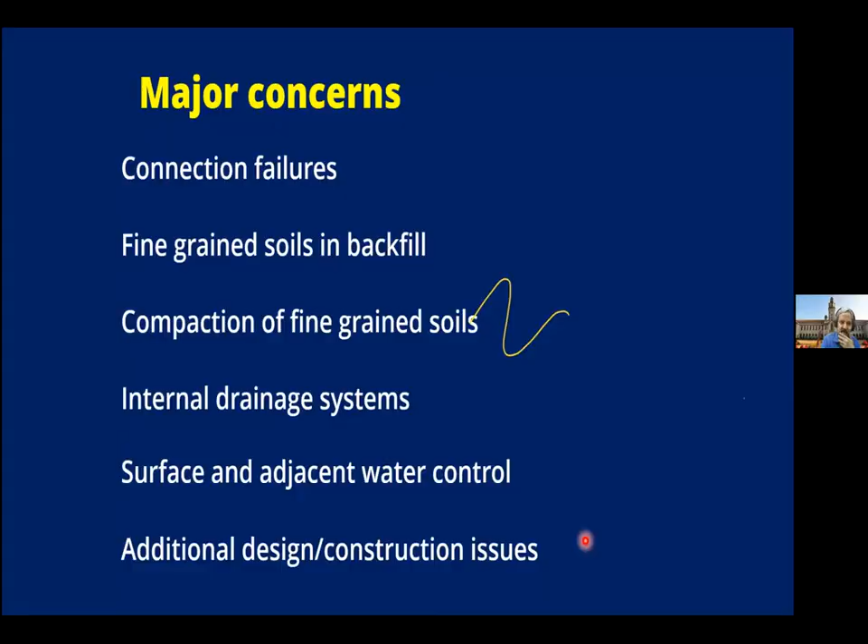Then there are additional design issues. As I mentioned, the loads on the connection are the maximum tensile force that comes from reinforcement. Sometimes in India, if the connection is not good and the soil close to that reinforcement is not compacted well, a lot of stress comes onto the connection joint, which may lead to additional moments and other issues. It can tilt - we have even seen facing panels slightly tilted. So it's important to understand the connection position to avoid this.

So we should do connection tests, like taking some products for testing. Nowadays what is happening is mix and match - they don't standardize products.

So that's a problem. So connection failures need to be addressed properly, and field tests also, because if things go wrong, like I just showed you, even if only 4 or 5 panels or 10 panels have come out, the image that we as civil engineers have, particularly in reinforced soil where we are promoting the geosynthetic industry, suffers, and it is a problem for us. So we can't allow such things.

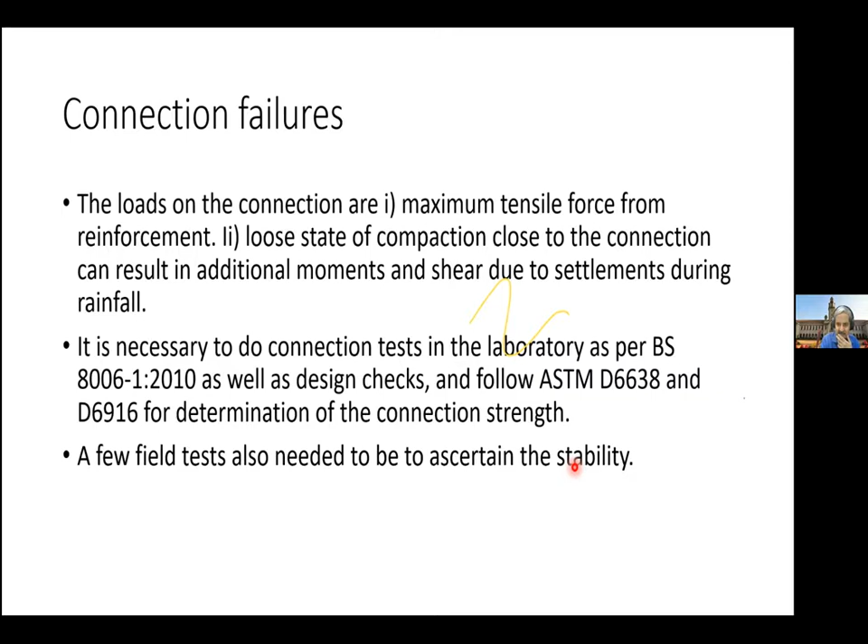Clays people are using, there is nothing wrong in that, and IRC specifies that more than 20% should not be used, but we should be much more careful. There is nothing wrong in using it, but you should understand the clay behavior properly. In fact, Professor Barry Christopher, who wrote the Federal Highway guidelines, says clearly that you have to understand the permeability. I even showed you an example where the permeability of sand itself was not okay because there was so much inundation due to infiltration.

So properties like permeability, undrained shear strength, drained shear strength, stiffness characteristics. Stiffness, as I said, if the stiffness is less, settlements will be more. So you need to give these in the specification. With all due respect, I have never seen complete information for the backfill. So what is the soil? Some 3 or 4 pages.

Take a backfill soil, compact it to the maximum dry density and whatever. Get the drained response. Then what is the stiffness? Then moisture density, all of this, then permeability, everything you measure and propose field specifications. Nothing is done. I never saw that specification document.

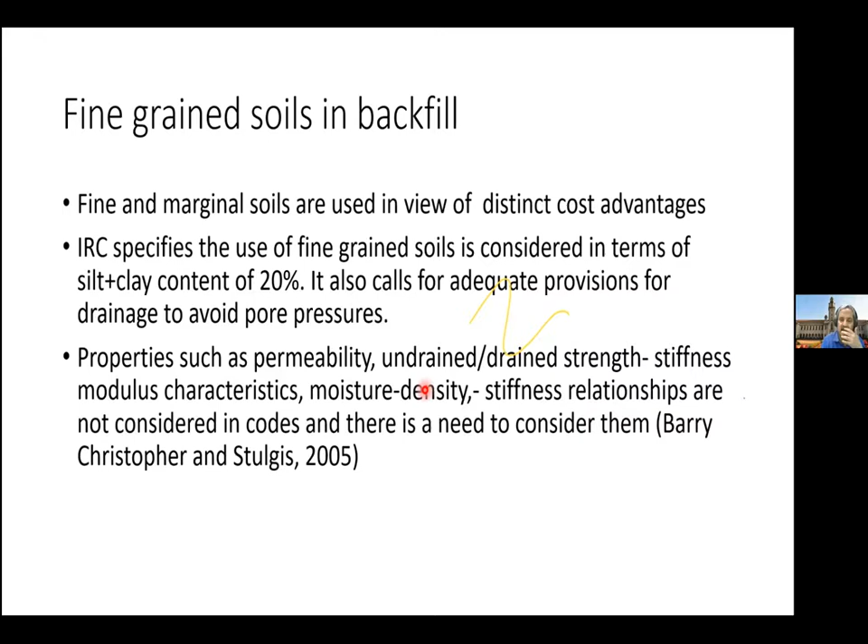So the corresponding modulus shall be evaluated and elaborated, and then the compaction lift thickness of 200 mm should be followed, because our people dump it. In the night, if you don't go, you don't know what is going to happen in the field. That affects compaction control, because compaction lift thickness ensures proper density. And backfill material close to the facing needs to be properly compacted.

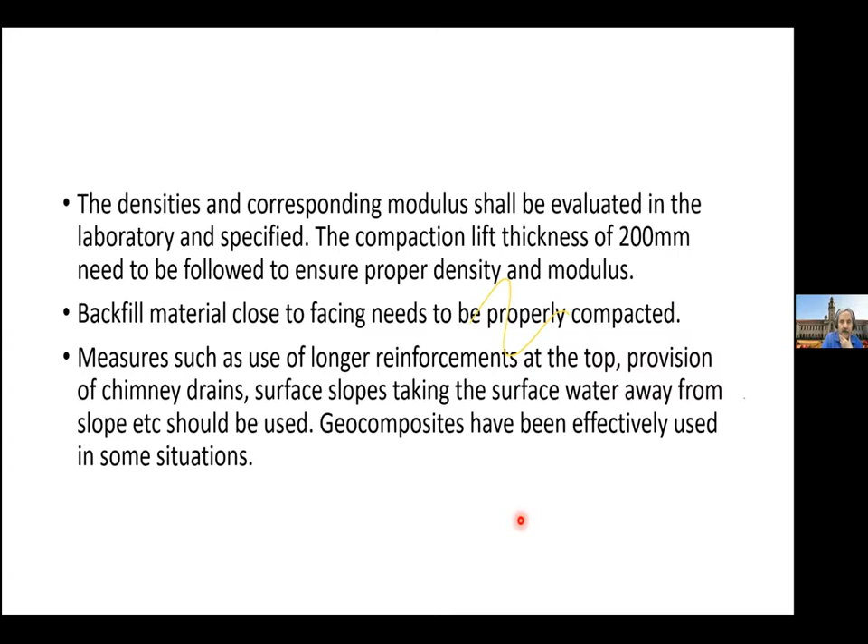And then there are also certain small tricks people try to use, measures such as long reinforcements at the top, secondary reinforcement, provision of chimney drains. Something you have to be extra cautious about. People tend to conclude that geosynthetics are not very good in India, but no. Maybe there's a lot of muck, and if you expect the geosynthetic material to behave in the presence of certain things, you have to properly understand the permeability behavior, geocomposite behavior, and all of that, and effectively promote the techniques.

Drainage provisions are very, very important because as per Federal Highway, drainage design has to be properly provided. One important thing I want to say about our design documents: unfortunately, the software generates the document, right? Generate document and automatic print. Yes, but I think it's all tricky.

I was just looking at one structure where the RE walls are supposed to have a design life of 50 years, 100 years, 120 years. There's a life associated with that. So you have to really design for the 1 in 100 rainfall, and get an idea of intensity relationships in the drainage basin and the effect of seepage forces. If you don't study that, definitely the forces will act on the wall. So you have to do a proper drainage design, and it should be reported with the design documents.

And then the provision of 600 versus geocomposite needs to be evaluated because of the IRC specification. We have to evaluate, and a site-specific design has to be given. It's not complicated because you have the rainfall data and all of these site conditions. Nobody gives that in any of the documents.

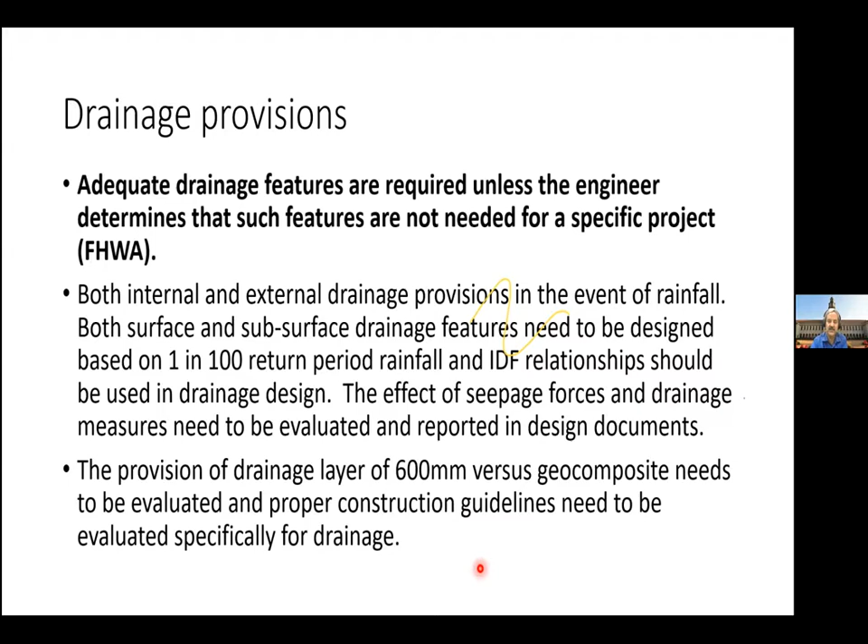So both drainage and filtration calculations need to be done as part of the design documents, with appropriate gradations and filters. Somebody will suggest some geosynthetic material, somebody will use that filter. I have never seen somebody using it properly because the client, like state government or national agencies, don't know. Somebody gave me their sample; is it useful? Nobody checked it for filtration. Of course, failures of filters are less, but at the same time, ineffective filters can cause a lot of problems.

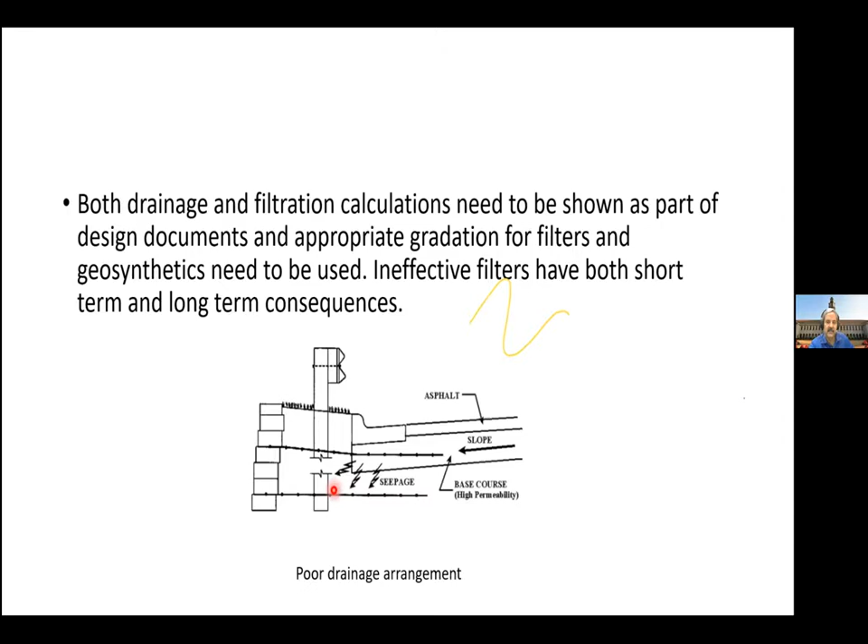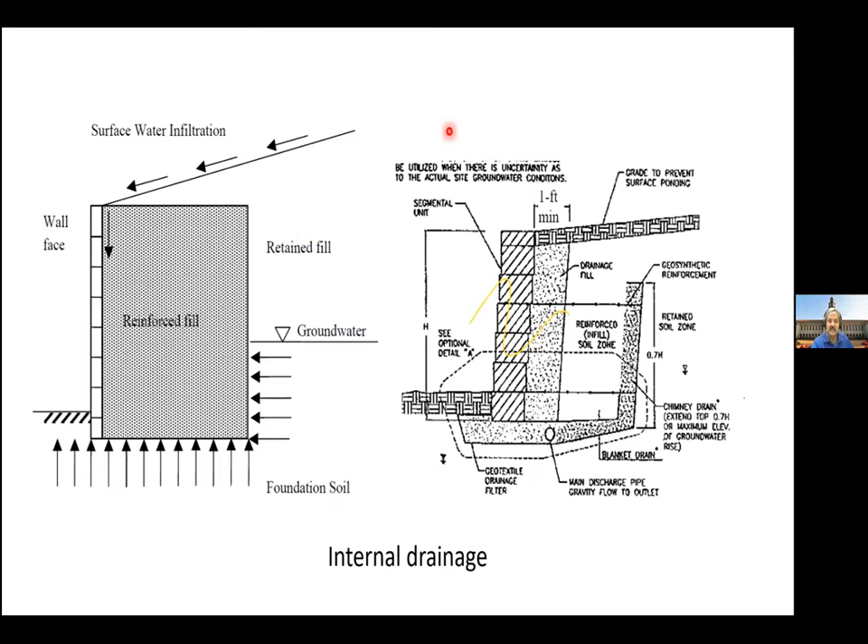So, it can lead to seepage and poor drain arrangement and all of that. Right? See, these are typical structures, and we need to really have proper analysis of the system. Then only it's possible. This is what I was trying to show here. So, for example, you have a collection.

See, the thing is, just now I showed you that they put a compacted backfill here. So you have to have good drainage here. Nothing should come to the backfill. Some other wall fill, you can say these are all wall fill. All the water that comes, you may even have a drainage, some sort of thing that can connect like this, so that the water gets collected.

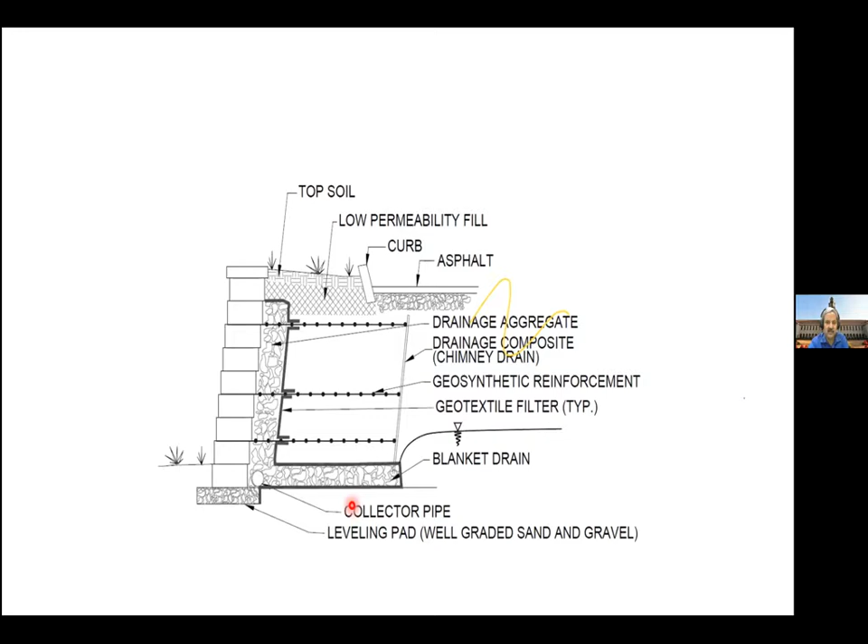These are all known, and you have to calculate. You can't be arbitrary, because how much seepage will come and how much is the discharge that comes. Very tough calculations. Now software programs are there, you can do it, but we can't allow failures.

A lot of people always come up with this question: some part of the wall is on the pile cap and the rest is on the soil. What should I do? Because it leads to differential settlements. People have seen that. So you can have some sort of system here, so there are methods available for this.

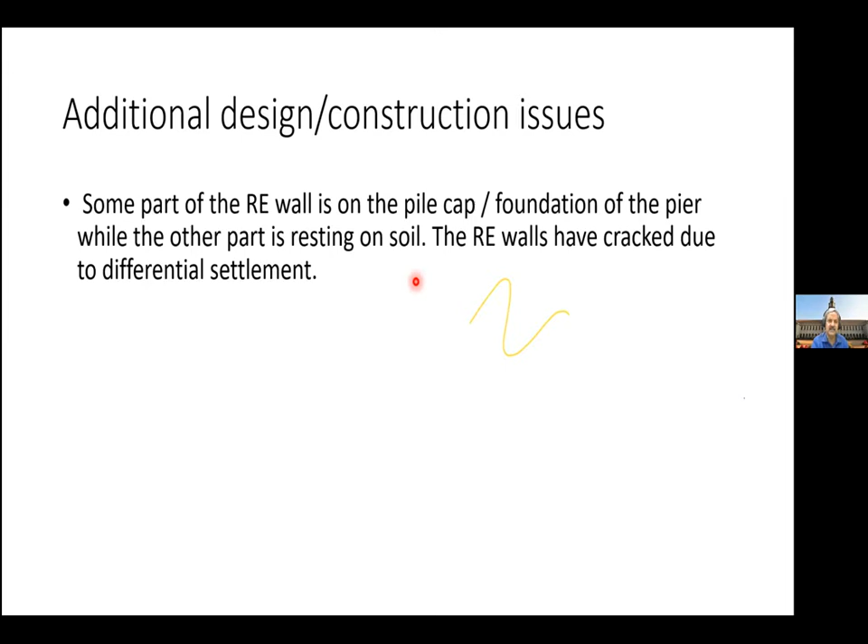So, we have to really look at each client, if they maintain records. Like the NHAI, if they don't have data on what failures occur, then it is difficult. Like, you go to a doctor and you should have your health record. It's like that. So construction observations and review of the field reports during construction need to be done by geotechnical engineers.

Actually, the employment of geotechnical engineers is not there. You have 1 or 2 persons working here and there for the whole project. The moment he runs here, compaction is done badly there. See, the guidelines are available. NCMA guidelines clearly tell you the role of each of the persons, what is the role of a civil engineer, what is the role of a geotechnical engineer. But if you have only one person for the whole project and he doesn't know much, then it's a problem. Some of the software you should be careful with, but you have to understand all the problems.